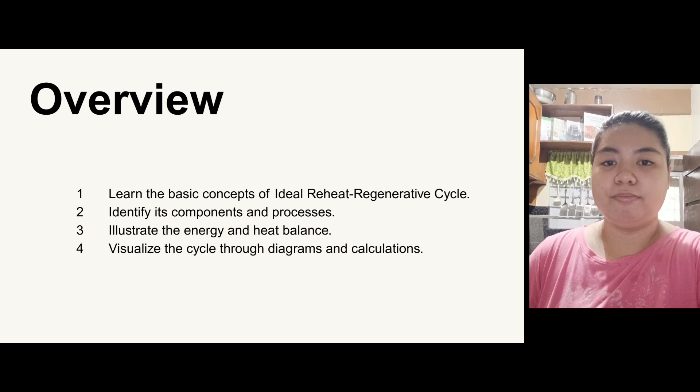Why improve power cycles? First, let's talk about why we're even improving power cycles. In traditional steam power plants, a lot of energy from fuel doesn't get converted into useful work. Sometimes it is lost, mostly as heat. Improving the cycle efficiency can help us reduce this waste, leading to major savings in fuel consumption. It also means fewer emissions, longer equipment life, and better performance overall. In a competitive world, higher efficiency isn't optional, it is necessary.

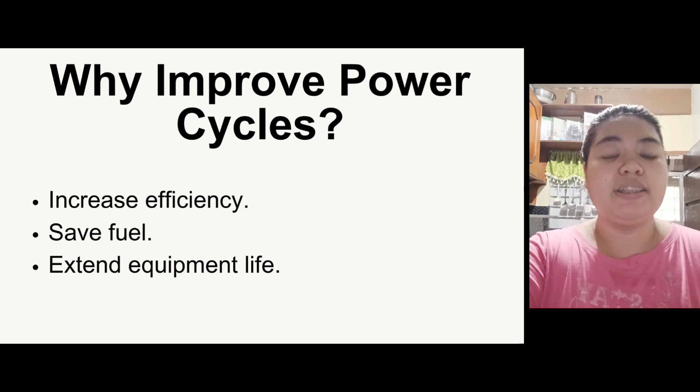Let us move on into the basic Rankine cycle recap. Before we dive into advanced versions, let's quickly recall the basic Rankine cycle. The cycle has four major processes. First, we generate steam at high pressure in a boiler. Then the steam expands through a turbine, producing work. After expansion, it condenses into water in a condenser. Finally, a pump sends it back to the boiler, completing the loop. This is simple and robust, but not very efficient, especially at higher outputs.

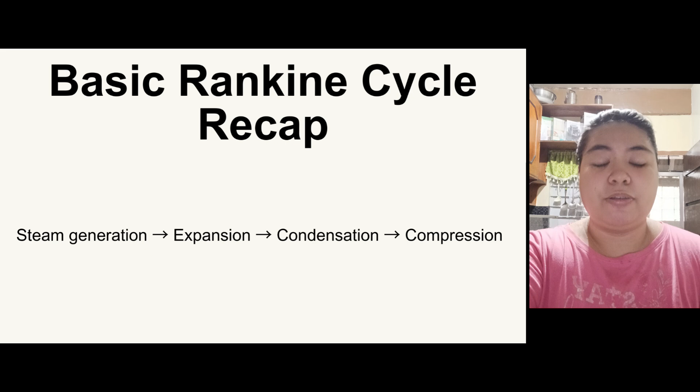Now I will introduce reheat and regeneration. To address the inefficiency of the basic Rankine cycle, engineers introduced two important modifications: reheat and regeneration. Reheating involves partially expanding the steam, reheating it, and expanding it again. Regeneration involves extracting a portion of the expanding steam and using it to preheat the feed water before it enters the boiler. Both methods significantly boost efficiency but in different ways.

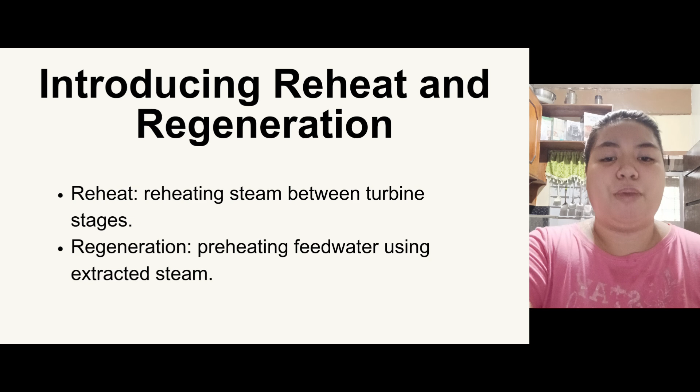Next is the diagram that shows how the Rankine cycle is modified using reheat and regeneration. For reheat, steam expands in a high pressure turbine, is reheated in the boiler, and then expands again in a low pressure turbine. This improves efficiency and reduces turbine moisture. For regeneration, part of the steam is extracted from the turbine and used to preheat feed water in the feed water heater. This reduces the fuel needed for boiling. The labeled components like steam turbine, feed water heater, and boiler help visualize the flow and energy recovery steps in the system.

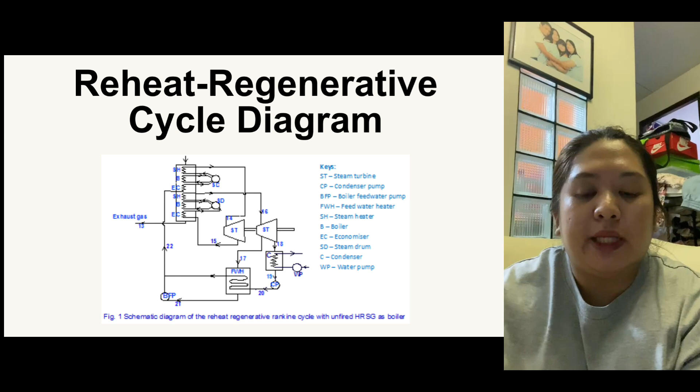This slide explains heat balance, which is the principle that energy entering a system equals energy leaving it plus any losses. This means the heat added to the system equals the net work output plus the heat rejected.

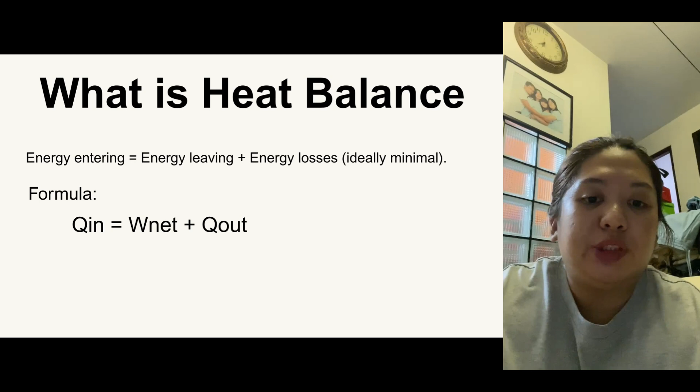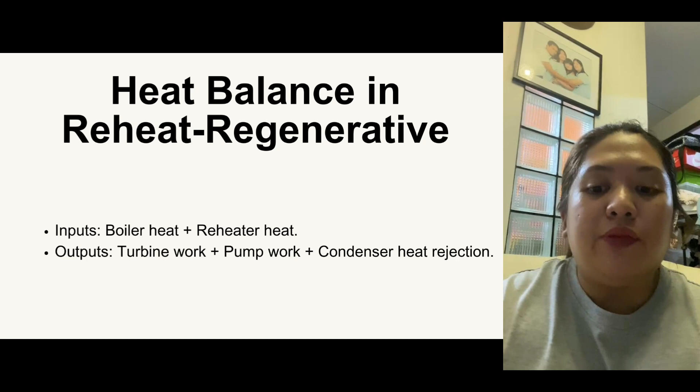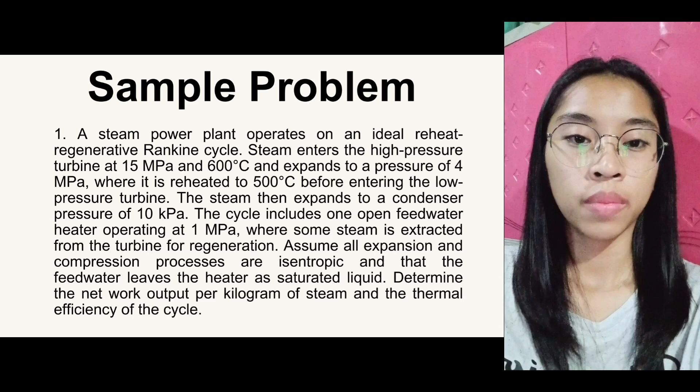Next is the sample problem. A steam power plant operates on an ideal reheat regenerative Rankine cycle. Steam enters the high-pressure turbine at 15 megapascal and 600 degrees Celsius and expands to a pressure of 4 megapascal, where it is reheated to 500 degrees Celsius before entering the low pressure turbine. The steam then expands to a condenser pressure of 10 kilopascal. The cycle includes one open feed water heater operating at 1 megapascal, where some steam is extracted from the turbine for regeneration. Assume all expansion and compression processes are isentropic and that the feed water leaves the heater as saturated liquid. Determine the net work output per kilogram of steam and the thermal efficiency of the cycle.

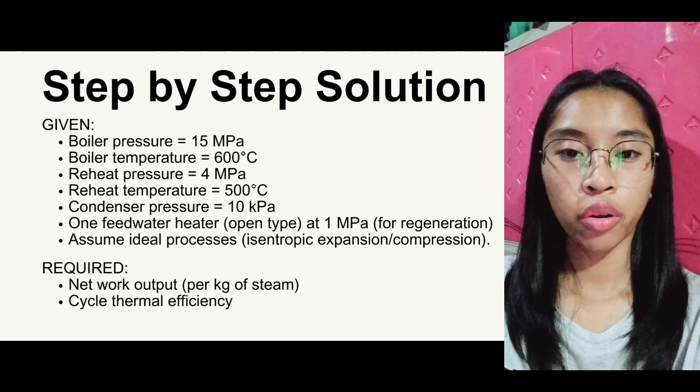Next, here are the given values for the problem. The boiler pressure is 15 megapascal, the boiler temperature is 600 degrees Celsius, the reheat pressure is 4 megapascal, the reheat temperature is 500 degrees Celsius, the condenser pressure is 10 kilopascal, and there is one open type feed water heater at 1 megapascal for regeneration. Assume ideal processes: isentropic expansion and compression. The required values for the problem are the net work output per kilogram of steam and the cycle thermal efficiency.

Next, the first step in solving this problem is to state the points definition. At point 1 is the boiler outlet before the high pressure turbine. At point 2, after expansion to reheat pressure before reheating. At point 3, after reheating before the low pressure turbine. At point 4, after full expansion to the condenser. At point 5, condensate saturated liquid at 10 kilopascal. At point 6, after the first feed water pump to feed water heater pressure at 1 megapascal. At point 7, saturated liquid exiting the feed water heater. And at point 8, after the second pump to boiler pressure.

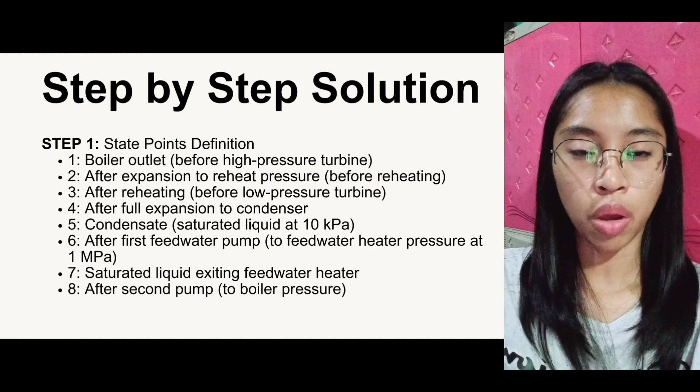Step-by-step solution, step 3: calculate for work and heat used, using the listed values per state. In this slide, the main focus is the turbine work, specifically the expansion process. The first one is the high pressure turbine work, where the formula is enthalpy 1 minus enthalpy 2. If we substitute it, it becomes 3583 minus 3160, which is equal to 423 kilojoules per kilogram.

Enthalpy drop from state 1 to state 2 in the high pressure turbine gives the work output per kilogram of steam.

The second one is the low pressure turbine, in which this accounts for a fraction of steam, the quantity of 1 minus y, expanding in the low pressure turbine. The given values are enthalpy 3, which is 3530 kilojoules per kilogram, and H4 or enthalpy 4, which is equal to 2100 kilojoules per kilogram. And it will become 1 minus y times 1430 kilojoules per kilogram.

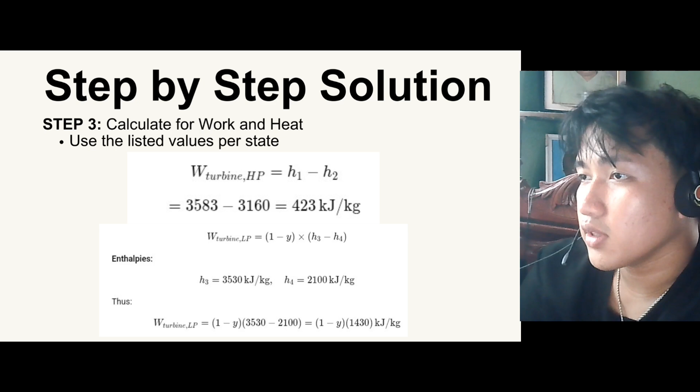For the next slide, we will focus on pump work, which is the compression process. Pump work 1 is equal to specific volume times the quantity of pressure 2 minus pressure 1. For water, the specific volume is 0.001 meter cube per kilogram. And for pressures, the given are pressure 2, which is 1000 kilopascal, and pressure 1 is 10 kilopascal. The formula will become 0.001 times the quantity of 1000 minus 10, and the answer will be 0.99 kilojoules per kilogram.

Pump work 2. The second pump raises pressure from 1 MPa to 15 MPa. It will become 0.001 times the quantity of 15,000 minus 1,000, and the answer will become 14 kilojoules per kilogram.

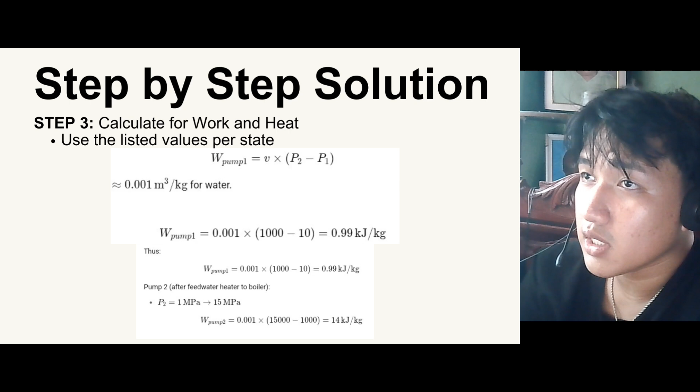In the next slide, there is a formula, and this slide explains how to calculate the heat added in a thermal power cycle, specifically in the boiler and reheater. Heat added in boiler: the formula is the quantity of 1 minus y, times the quantity of enthalpy 1 minus enthalpy 7. This formula calculates the heat added to the working fluid in the boiler.

The next one is heat added in the reheater, in which the formula is 1 minus y times the quantity of enthalpy 3 minus enthalpy 2. This formula calculates the heat added in the reheater, where enthalpy 3 and enthalpy 2 are enthalpies after and before reheating. Thank you.

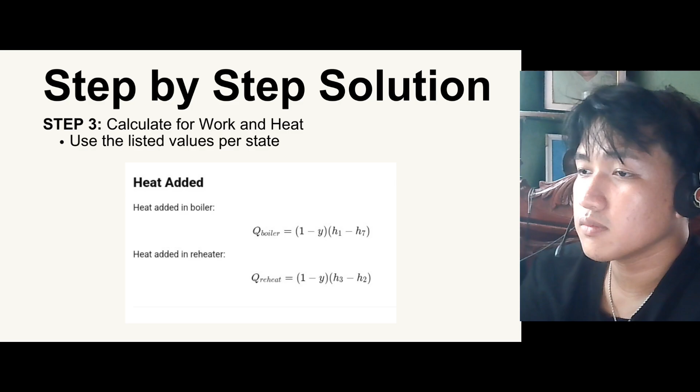Okay, in this next step, step 4, solve for the extraction factor. At the feed water heater open type, applying the energy balance, so energy in is equal to energy out. And here are the solution for that.

And then we solve for the y. Okay, y is equal to h7 minus h6 over h2 minus h6. And here are the givens. And then if we substitute all of this, we will get 0.192. Thus, about 19.2% of the steam is extracted at 1 MPa.

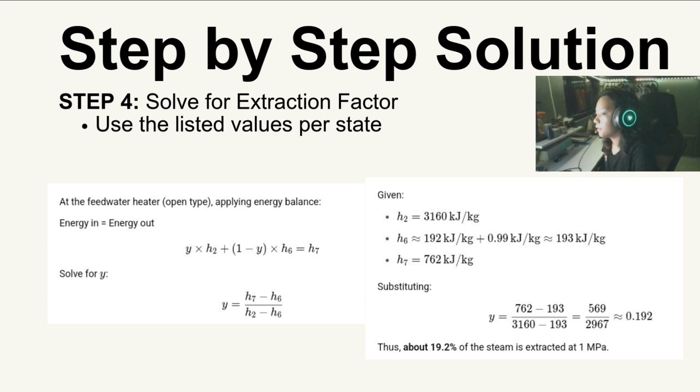Next step, step 5, final calculations. Use the listed values for state. Now we solve for turbine work. Total turbine work: work turbine is equal to work turbine high pressure plus work turbine low pressure. And then we substitute the given values and we will get 1578 kilojoules per kilogram.

In this step, we continue the final calculation and we make sure we are using the correct values for each state and double checking our math so everything adds up properly.

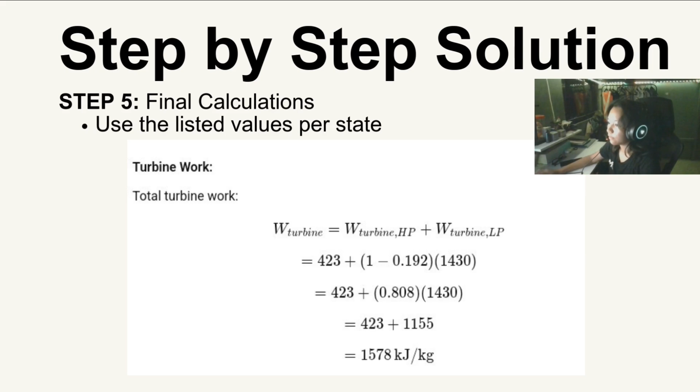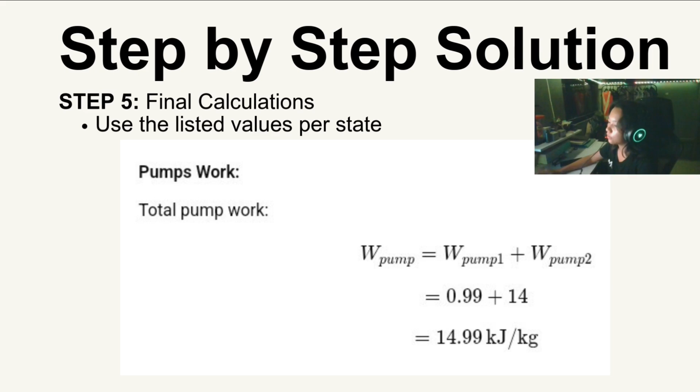Okay, here we're still working on the final values and it's important to keep all the units and numbers consistent so we don't make mistakes when adding or subtracting the results.

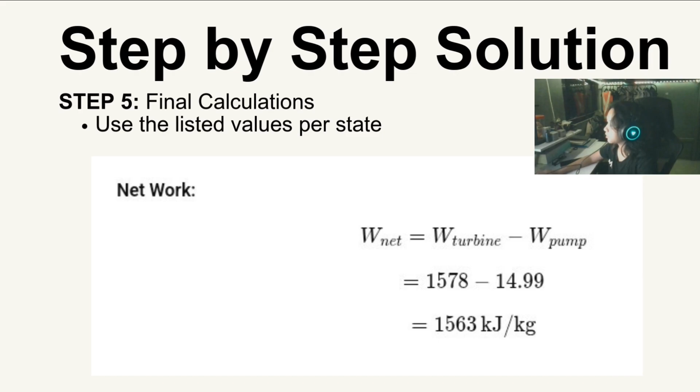For total heat added, we have Q in boiler and Q in reheater. In Q in boiler, we have 1 minus 0.192 times H1 minus H7. We have 0.808 times 3583 minus 762. The result will be 2279 kilojoules per kilogram.

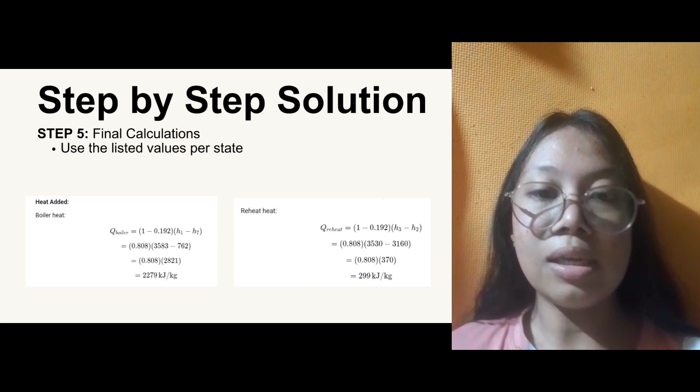In Q in reheater, we have 1 minus 0.192 times H3 minus H2, which is equal to 0.808 times 3530 minus 3160, equal to 299 kilojoules per kilogram.

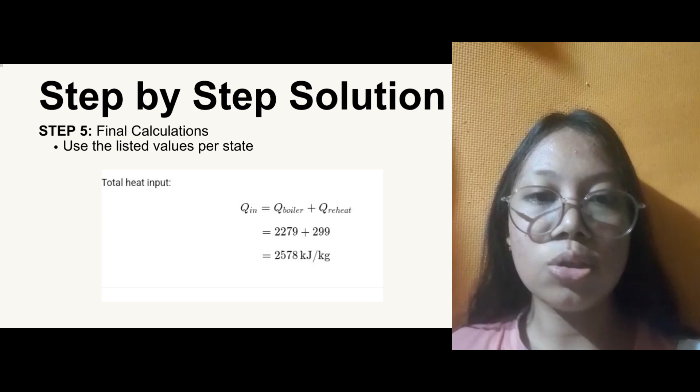For total heat added, we have Q in boiler plus Q in reheater. We have 2279 plus 299. The result will be 2578 kilojoules per kilogram.

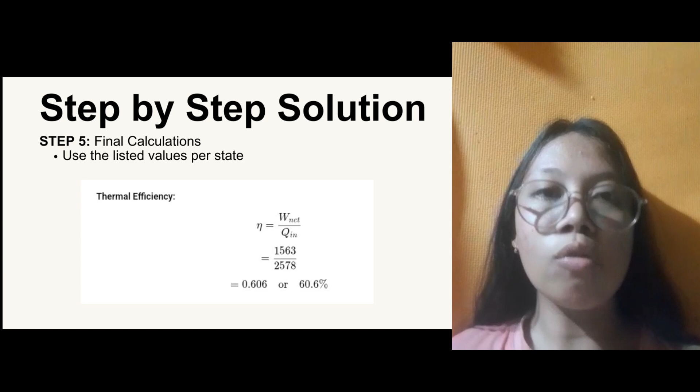In finding the thermal efficiency, we have thermal efficiency is equal to work net over Q in. 1563 over 2578 times 100 is equal to 60.6%.

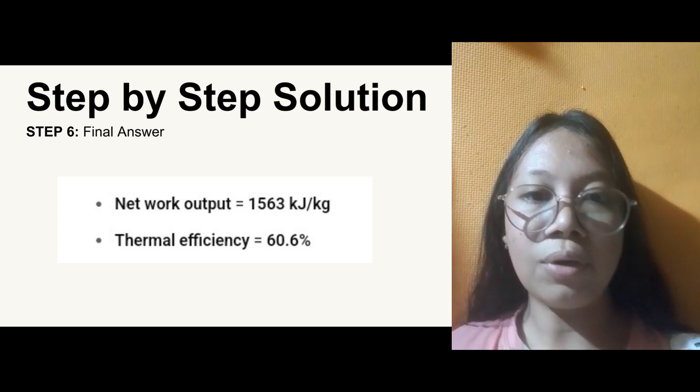So the final answer: we have the net work output of 1563 kilojoules per kilogram and thermal efficiency of 60.6%.